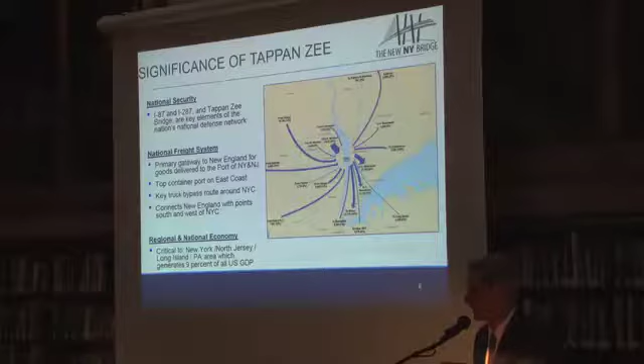So the significance of the Tappan Zee - it's strategically located and meets the criteria for critical infrastructure according to the Department of Homeland Security. It's a primary gateway for goods being delivered to New England from the ports of New York and New Jersey. It's obviously a major commuter corridor as well, and also receives a good deal of recreational travel on weekends, especially this time of year. So it's important to the local, regional, and national economy.

Why do we need to replace the bridge? Well, it was opened in 1955 and said to have a service life of 50 years. And that turned out to be a pretty good estimate, because it was in the late 90s and early 2000s when the Thruway Authority needed to spend increasing sums of money just to keep the bridge operational.

The bridge carries 145,000 cars a day, which exceeds the design that was considered by a good amount, 40% more than what it was planned for.

We're always on the morning and afternoon traffic reports, which is never a good thing. The accident rate is twice the average for the whole thruway system, and that's exacerbated by the fact that we don't have any shoulders for emergency vehicles or any disabled vehicles. So even a minor fender bender, someone with a flat tire, there's nowhere to go, and it results in significant backups.

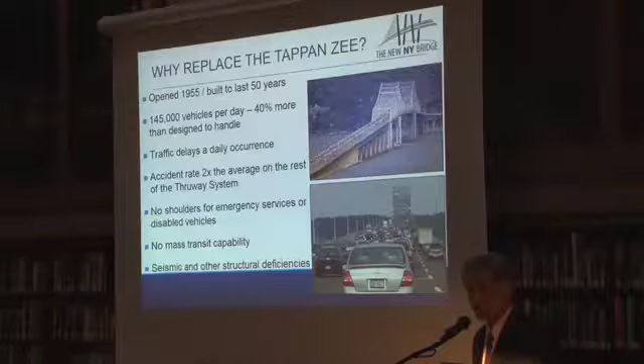There's no mass transit capability. Remember, I talked about the corridor study and the desire for mass transit at some point in this corridor. And also we have seismic and other structural deficiencies, but I can assure you that the bridge is safe, so don't worry.

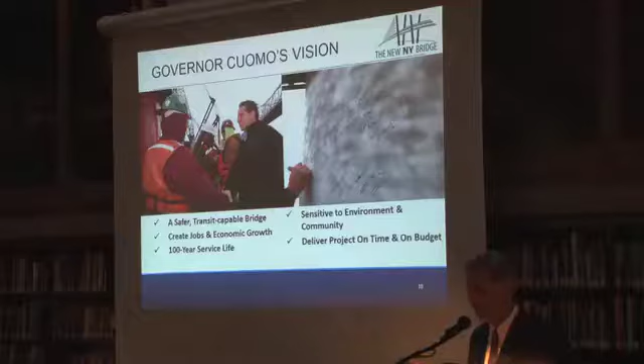So in 2011, after a decade of study under the corridor project, Governor Cuomo decided it's time to build the bridge, and we pivoted from that 30-mile corridor project to a standalone bridge project. He laid out several objectives at that time: first, build a safer, transit-capable bridge, going back to the corridor study.

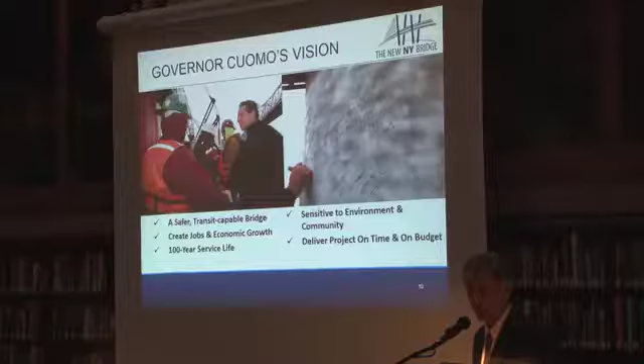Create jobs and economic growth. We were just coming out of the 2008 recession, so there was a desire to improve the economy. Also, a 100-year service life before major maintenance. We didn't want to come back in another 50 years and have to do this again, unlike the first bridge.

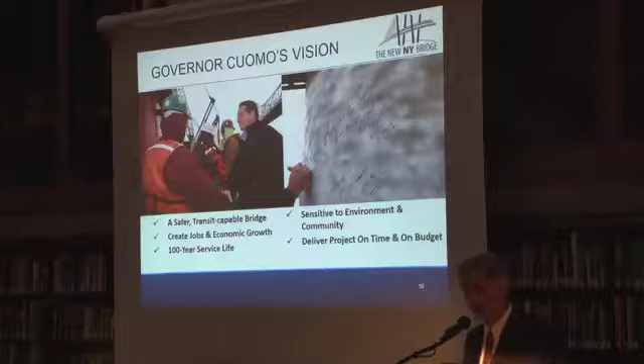Sensitive to the environment and the community, we wanted to go above and beyond the regulations and be good stewards of the environment. We also wanted to be good neighbors to the community. The communities on each side of the bridge were kind of under a cloud for a long period of time, not knowing if the bridge was going to be replaced, what the impacts would be to their communities, because when the bridge was originally built in the 1950s, it had a pretty significant impact on both the Rockland and Westchester side, as you can imagine.

So we had a good neighbor policy for the project, and we wanted to deliver the project on time and on budget, and that got us to the design-build project delivery mode. So here's an overview of the existing bridge.

We have 7 lanes, no shoulders, as I mentioned. We have a central movable barrier, so twice a day that barrier is moved to allow a 4th lane in the peak direction: 4 lanes eastbound in the morning, 4 lanes westbound in the afternoon.

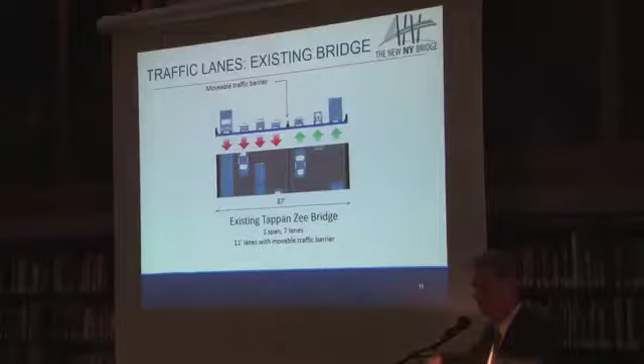So I'll go through a little bit of the sequencing, or the staging of construction. Here's the existing bridge, and the new bridge, or bridges I should say, will be built immediately north of the existing one.

So we took advantage of available right-of-way to the north of the bridge, and were able to build the entire northern span without impacting traffic on the existing bridge. We're also able to build about 80% of the southern span, or eastbound structure, as well at this point in time, and this is the stage we're currently at right now.

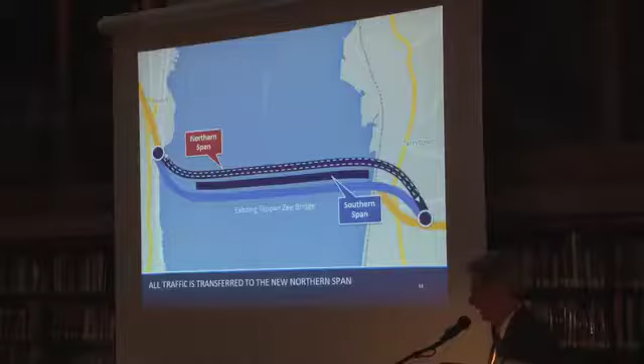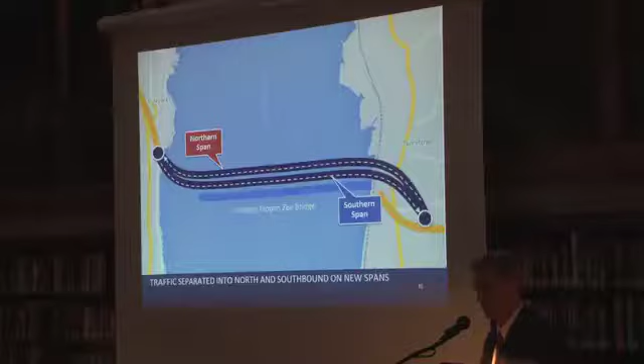Later this year, hopefully in a couple of months, we're getting ready to move all traffic from the existing bridge onto the northern span, which will then allow us to proceed with demolition on the ends of the existing bridge so that we can complete the southern span. That'll happen about a year from now, in 2018. And then, of course, the last stage is to demolish anything that's left of the existing bridge.

So the configuration, when all is said and done, will look something like this. The northern span, which is 96 feet wide, is where we're going to have all 8 lanes of traffic in a couple of months. That width was determined by the need to maintain traffic.

But in the final configuration, we'll have 4 standard 12-foot travel lanes, a standard shoulder of 10 feet on the right, and an over-wide left shoulder, which will provide the ability for a dedicated bus lane, again thinking of the multimodal desire here. And significantly, we'll have a 12-foot wide shared use path for pedestrian and bicycle use, which is something that's obviously not available now to the communities to cross this part of the river by bike or walking.

The southern span, or eastbound structure, is 87 feet wide, and that width was driven by the desire for operational redundancy. If something should happen to one bridge or the other, we wanted the ability to maintain traffic on the other bridge, so we built it a little bit wider just in case.

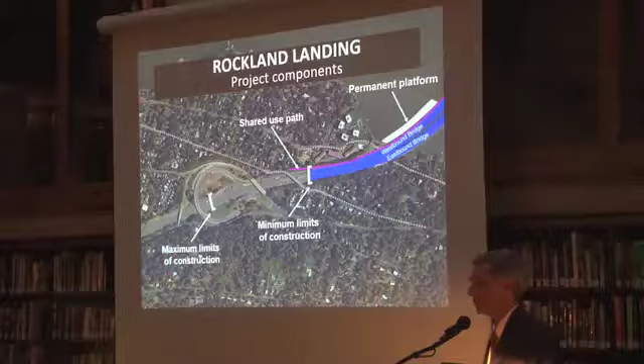On the landings, there's a very limited amount of work, just what's necessary to stage the work for the bridge construction. The shared use path will extend all the way into the interchange 10 area, where it will connect to other similar facilities on the Rockland side. We also have a permanent maintenance dock here for the thruway's marine vessels to maintain the new bridge.

On the Westchester side, it's a little more complicated. We still have the roadway reconstruction, and we also have the shared use path connecting to Route 9, which is South Broadway in Tarrytown. But we also have a number of thruway facilities, namely the maintenance facility and the state police facility.

We gave the contractor the option to either rehabilitate these buildings or replace them and use this area as a staging area. They chose to replace it, so they had to move all of our staff to a temporary location about 8 miles away on the Rockland side, and then used this area for their bridge work. Now that we're getting close to completion, they've started reconstructing these facilities for us.

Also importantly, this is where the existing toll plaza was. It was a conventional toll plaza with 10 toll booths. We also had highway speed E-ZPass at this facility.

During the development of this project, the Thruway Authority was just contemplating going to all electronic toll collection, which I think a lot of toll facilities are doing down in the metropolitan area. So we were at a watershed moment where we needed to decide if we were going in that direction, and this project kind of pushed us into that.

As you can imagine, if we were to have a conventional toll plaza here with highway speed E-ZPass, we'd actually be affecting the entire eastbound bridge back to the main span, needing enough distance to taper out to get into the toll plaza. So by going to all electronic toll collection, we reduced the footprint on the land, but also, more significantly, on the bridge itself—less bridge to build and less bridge to maintain.

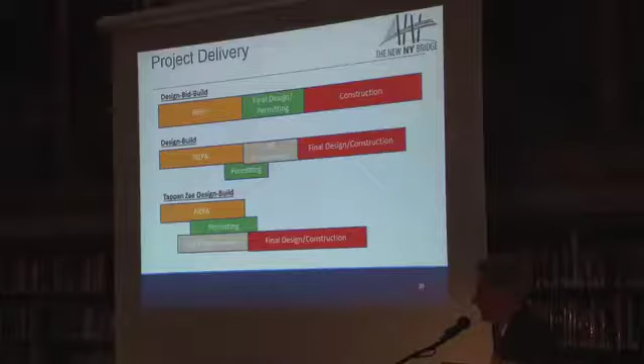I'll talk a little bit now about the design-build procurement, and most significantly, how it overlapped the environmental impact statement. At the top, you can see the normal process for design, bid, build. You do your environmental documentation, analyzing impacts, doing your evaluation of alternatives. Then you do your final design, and then you go to construction.

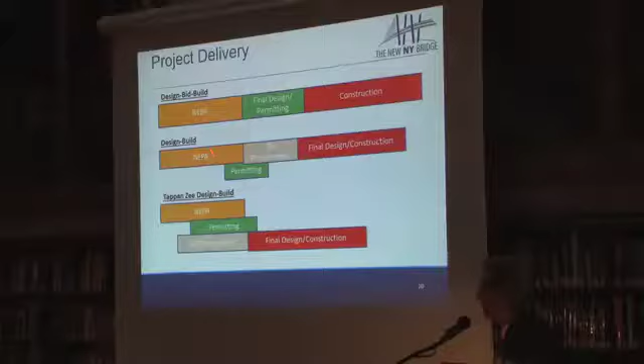Design-build normally upfronts the permitting a little bit, but you wait for your environmental assessment to be done to pick a preferred alternative, and then you go through the design-build procurement. Well, on this project, we did everything all at once, in the desire to get to construction sooner. As you know, our governor doesn't have a lot of patience, right?

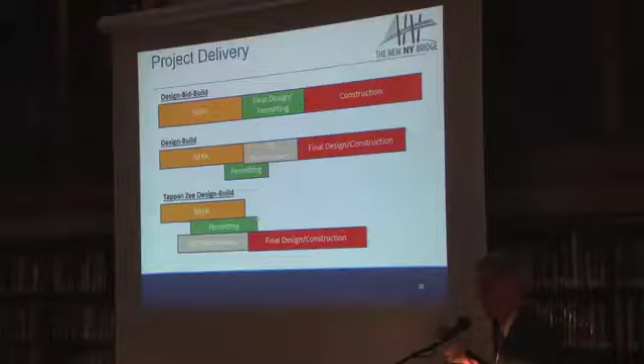So sooner the better. We were able to do this because we had only one build alternative—otherwise, you're not able to do this. So the proposers were able to focus on just the replacement option for the bridge.

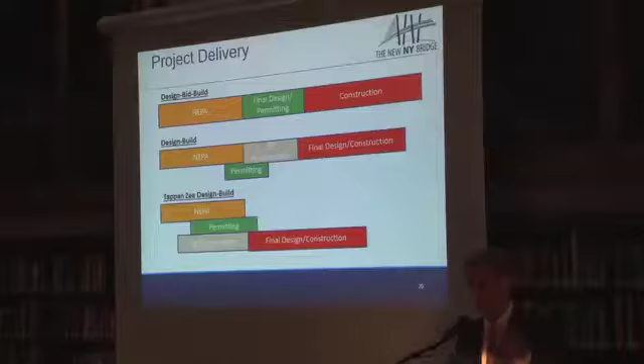This was challenging because we were meeting with proposers confidentially during the procurement process, meeting with the public in forums such as this during the environmental impact statement, and meeting with regulatory agencies to talk about environmental permitting. So we'd be reacting to various things we heard from each audience and had to make sure the corresponding documents were reconciled—in other words, did something the proposer said confidentially fit into the bounds of the environmental impact statement?

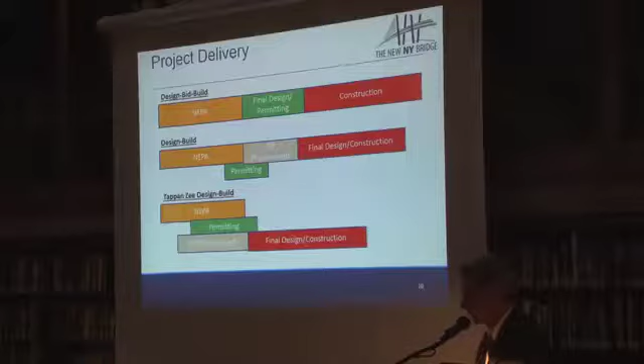And did we want to perhaps allow that or not? Or something happened in a public forum and we changed our minds about something, we needed to relay that to the proposers. So it was a very dynamic stage of the project and very challenging. The procurement was a one-year process.

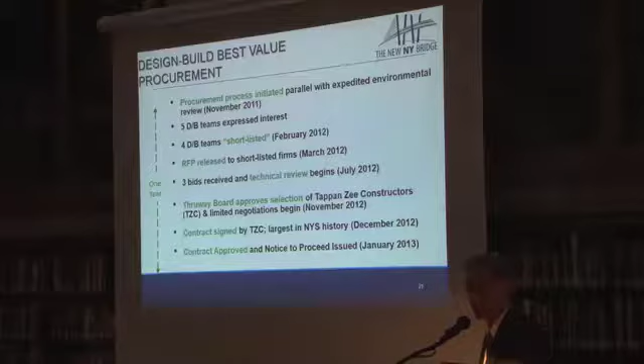This was the first design-build contract in New York State. In November of 2011, we got enabling legislation. We released the request for qualifications and received interest from 5 design-build teams. We shortlisted them to 4, and finally received proposals from 3. It was the largest contract in state history, and I believe it still is. We issued a notice to proceed in January of 2013.

Some of the things that made the procurement successful: we had to pay the unsuccessful proposers. We had to do a lot of convincing to the state comptroller that we needed to pay contractors to submit a proposal. Very unheard of, but necessary for a couple of reasons. One was to instill confidence in the industry, this being our first design-build contract. The other was because proposers spent significant amounts of money to submit a bid, up to $6 to $7 million, so they needed at least some compensation to offset that risk.

We also did what we call smart early work. One of the things about design-build is that you transfer risk from the owner to the design-builder because they're designing and constructing it. But to limit risk, you want to provide them as much information as possible, because risk equals cost, particularly their contingency costs. So we did a test pile program and soil borings across the riverbed, because the foundation work was probably the riskiest and most challenging part of the project, up to 40% of the cost. We wanted to give them the best information we could to limit their risk.

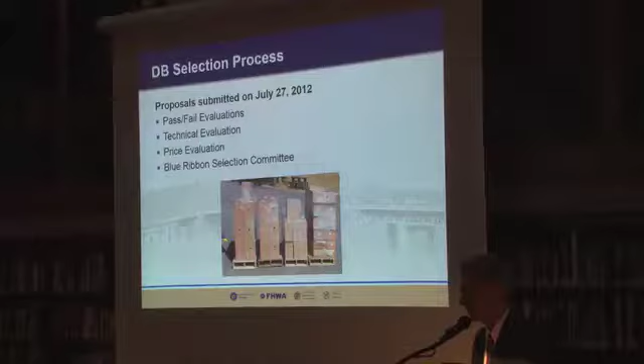The selection process was a 4-part process: a pass-fail evaluation, financial ability and other evaluations, the technical evaluation which was the quality of their proposal, and the price evaluation. Price and technical were weighted 50-50. Then we had the actual selection committee, made up of industry leaders and some community representatives.

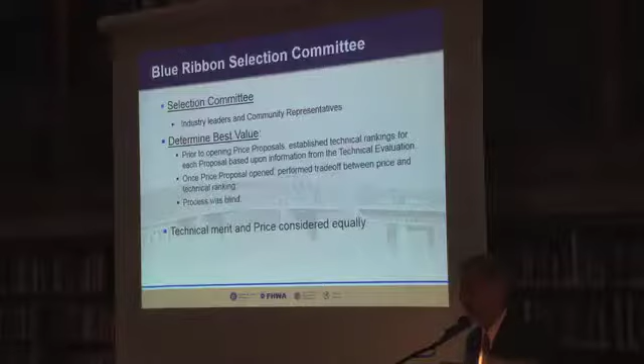Prior to the selection committee seeing the price, they ranked the proposals based on technical quality, done blind — they didn't know the proposer's name, we gave code names. So they would rank the proposers 1, 2, 3 according to technical merits, and then they were provided the price. It would be easy if the highest-ranked proposer on quality was also the low bid — then it's a no-brainer. But that seldom happens, so they have to do what's called a trade-off analysis.

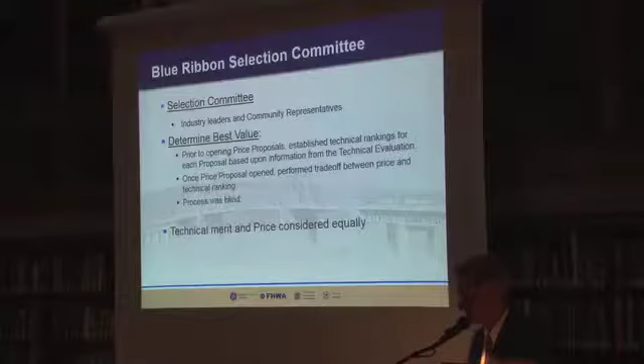In this case, Tappan Zee Constructors was declared the best value proposer, with a bid of $3.142 billion — we like to call it the pie bid. It's also about the length of the existing bridge, 3.1 miles — I don't know if that's just a coincidence. Tappan Zee Constructors is a consortium of 4 large firms: Fluor, Granite Construction, Traylor Brothers, and American Bridge, which incidentally was the contractor that built the existing Tappan Zee. HDR is the lead design team.

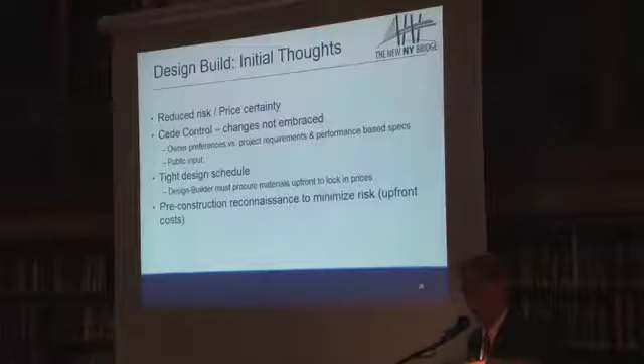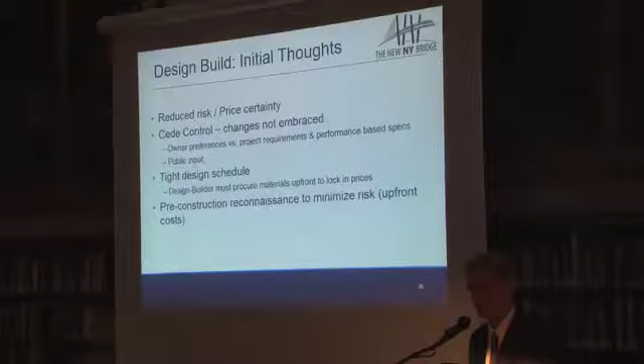So after 4 years with design-build, what do we think? It's definitely reduced our risk as the owner, as the number and magnitude of change orders on the contract, or extras, is significantly less compared to design-bid-build. However, you cede a lot of control because you don't have prescriptive requirements — it's more performance-based. So preferences are very difficult to have the design-builder adopt, and they resist any types of changes. It also limits the amount of meaningful public input after you select a design-build team.

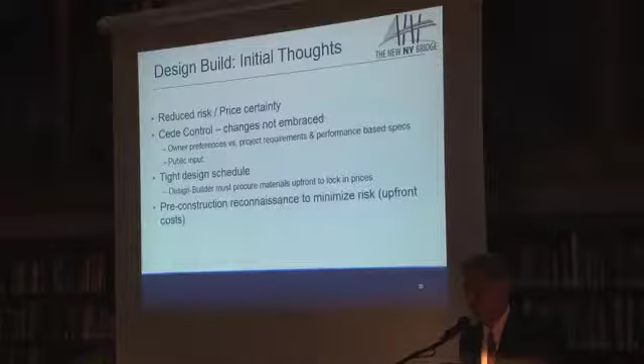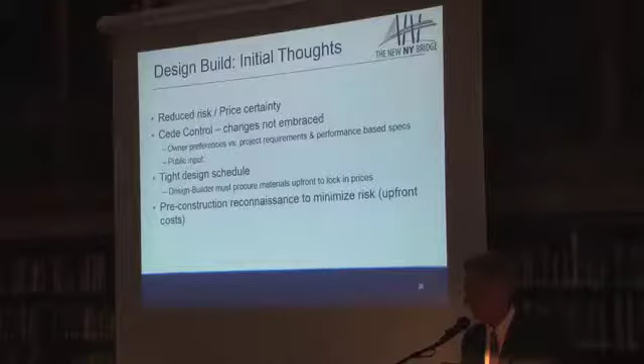We were also naive with respect to the design schedule. It was very aggressive — we figured a 5-year construction project, with design happening just in time for each element to be constructed up till maybe year 4. But they wanted the design done in 18 months, largely so the contractor could procure materials and limit their risk from price escalation. A lot of projects at this duration would normally have price escalation clauses, for asphalt, gas, or steel, so if industry prices went up the contractor would be compensated. In this case we didn't have those escalation costs, so the design-builder wanted to procure materials and lock in prices.

I'll talk a little bit about the approach spans. When I mention approach spans, that's everything except the main span, the cable-stay portion. On a lot of bridges the approach span isn't significant, but when we have a 3-mile long bridge, that's the majority of the bridge structure in this case. Here's a rendering of what it'll look like when done — typical steel girder construction, but the spans are much longer than the existing bridge, 350 feet long. So we only have 44 spans for the new bridge as opposed to the 198 on the existing, meaning a lot less infrastructure in the river.

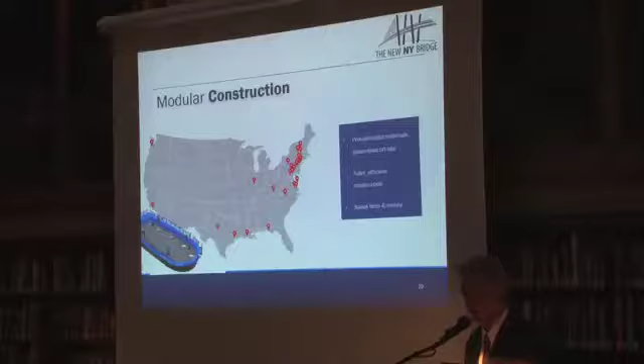So some of the things they had prefabricated were the pile caps, done in North Carolina. We also had the pier caps, the structure on top of the pier columns, fabricated in Virginia and barged up to the bridge site. And then, probably most importantly, they had a steel assembly facility just south of Albany.

The foundations were the area of greatest risk and uncertainty, because of the challenging underlying soil conditions of this part of the Hudson. You have the first layer, an organic silty clay, or as those of us non-geotechnical engineers like to call it, muck. With this muck, the first 70 feet or so of a pile is basically driven by self-weight. So the contractor was concerned about actually losing a pile, never mind having to hammer it in place — it just sunk.

After getting through that, you encounter a hard layer of glacial till. You think you've hit rock, but it's glacial till, so you have to get through that. Then, if you're lucky, you reach bedrock. But that bedrock has a lot of sloped rock conditions, making it very difficult for piles to grab into. So there was a large concern about pile damage. Luckily, over 1,100 piles on this project, and only one so far has been damaged. The piles are typically steel pipe piles, open, 1 inch thick, varying in diameter from 3 feet to 6 feet.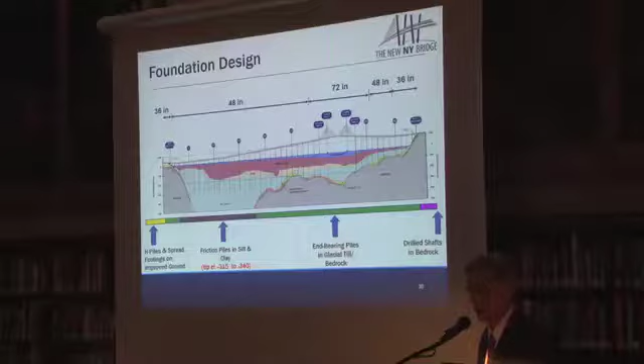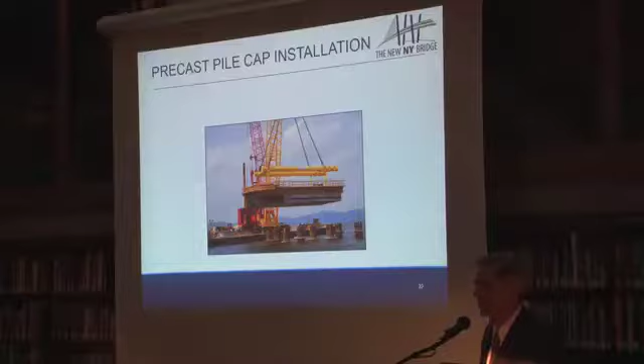Here are those pile caps made in Virginia, at the fabrication facility. You can see how extensive the reinforcing is. On the right, a section is being readied to put on a barge to deliver to the project site. Once it gets there, it's lifted onto the piles that were driven. On the bottom of this 'tub,' as we like to call it, there are holes 1 foot larger than the diameter of those piles — so a 4-foot diameter pile would have a 5-foot hole. It was pretty amazing how accurate this was; we only had a couple of occasions where they needed to chisel out a little concrete to make the tub sit on the pile, but largely it was done to perfection.

Now here's the pier cap. These were again precast in Virginia. Originally, Tappan Zee Constructors was not going to precast the pier caps, but because of the success with the pile caps, they decided, hey, why not? So the columns were cast in place. You can see the reinforcing steel sticking up from the columns, and there were sleeves in the bottom of this pier cap. Again, the precision needed for all this to go together was significant.

Another big element of this contract was a floating batch plant — we had 3 of these. It would have been virtually impossible to do this any other way, to have concrete delivered conventionally by truck. It would have been over 20,000 trucks necessary for all the concrete needed for the bridge. These plants were all certified by DOT as a typical plant facility would be.

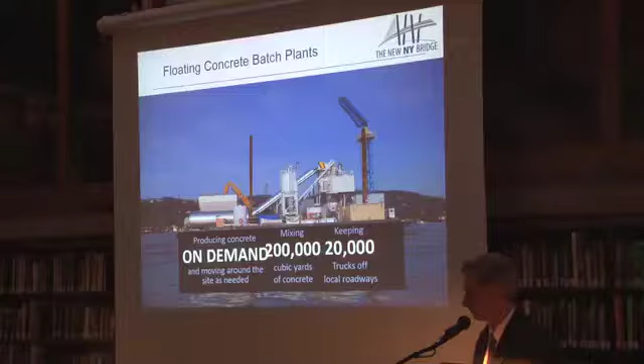Here's that pre-assembly yard, just south of Albany, about 100 miles north of the bridge site. There were 2 primary steel fabricators, one in Pennsylvania and one in Virginia. They fabricated steel girders 100 feet long, 12 feet high, delivered them to this site, and then in assembly line fashion spliced the 100-foot long girders into lengths of up to 400 feet, also conjoining 2 or 3 at a time. Any utilities were also put on between these girders at this site, again reducing the amount of work that needed to be done at height over the bridge.

Once they were fabricated up at that facility, they were then placed on a barge and floated down the Hudson. You don't get a real appreciation for the size of these things at a distance, but they're 12 feet high, double me.

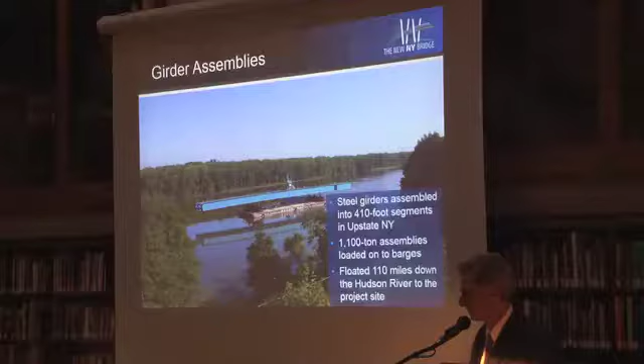The other significant piece of equipment on the contract was this huge crane, the I Lift New York super crane, otherwise known as the Left Coast Lifter. It was originally built for the San Francisco-Oakland Bay Bridge, and luckily they had the foresight to think maybe it'll be used on the East Coast, so they made it to just fit through the Panama Canal. And I mean just - it wasn't a lot of clearance.

That was brought to the bridge site. They had to wait for a super low tide to get it under the existing bridge with the boom down, literally only having 4 or 5 feet of clearance. This piece of machinery is able to lift up those 400-foot long sections of steel, 12 feet high, 2 or 3 at a time.

Now, being so big, it's very clunky to move this big crane. The boom doesn't rotate like most cranes do, so you just set everything in that one position. It's a series of cables and tugboats that kind of maneuver this thing to set the steel in place. It's a pretty complicated operation. The first time they did this, it took about a day, but after the learning curve, they reduced that to about half that time.

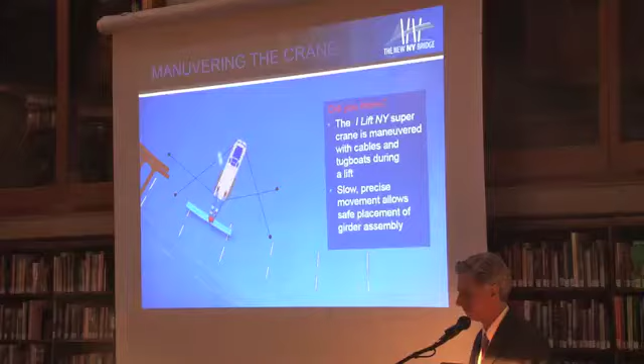All right, doesn't want to advance here. I guess it wants to set that last piece of steel. Here we go. And that video is not working, sorry. This should be... technical difficulties here. Try this way.

All right, you've seen that already. Sorry about this.

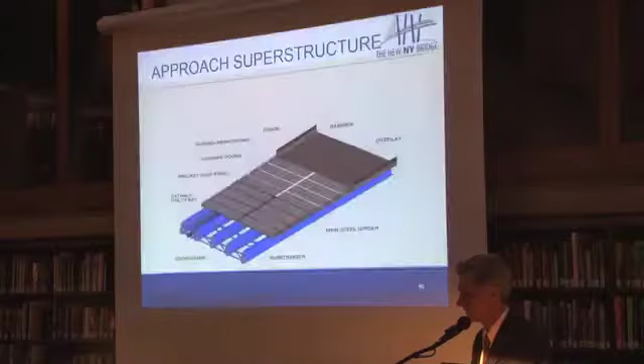After the steel comes the structural deck, which was also prefabricated panels. You can see this panelized system. They were made in Pittsfield, Massachusetts, and also in upstate New York, and delivered to the bridge by barge, then placed on the steel. That was followed by the cast-in-place closure pours, stitching those panels together, and then the final piece is the overlay, which is the riding surface.

Another neat design element for the bridge were these seismic isolation bearings. It's sitting on top of a pedestal, and this is the bottom of a steel girder. This illustrates how this bearing works under a seismic event - it allows the bridge to move in a controlled way to limit damage and also failure of the bridge during a seismic event. It also resets itself after a seismic event. Normally after any kind of earthquake you would need to go to the bridges that were affected and reset the bearings. This one is self-resetting.

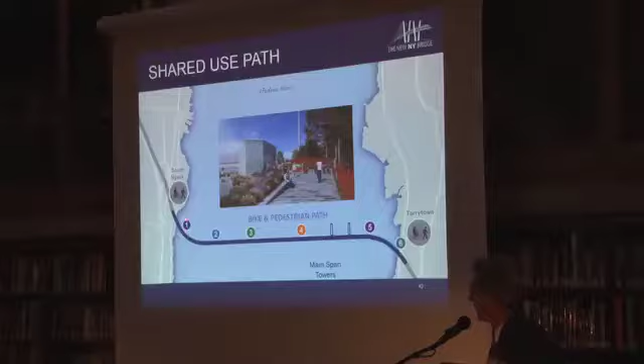The shared use path, which I mentioned earlier - one of the unique aspects of the project is we have amenities on each landing associated with the shared use path. We also have 6 what we call overlooks, and each one has a theme. This is one near the Rockland side, fish and ships. They also have amenities with seating and canopies, and this is one of the more fun elements of the contract, something the communities are looking forward to.

Onto the main span, cable stay bridge. The towers are 419 feet high, about 100 feet taller than the existing truss. They're splayed outward so that there's no cabling or other structural element above the roadway, which is important because there's no concern with icicles forming during the winter and falling on traffic. It also allows the Thruway Authority to do maintenance and replacement of cables without impacting traffic.

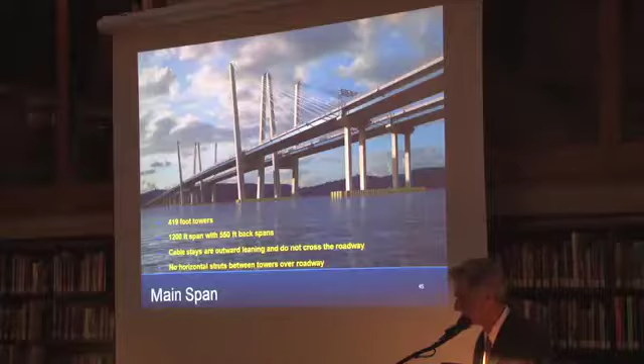Here's another view looking at the westbound bridge - here's the shared use path, and then the overwide left shoulder, right shoulder, and again nothing over the roadway, giving kind of a nice open feel to it. The foundations for the main span...

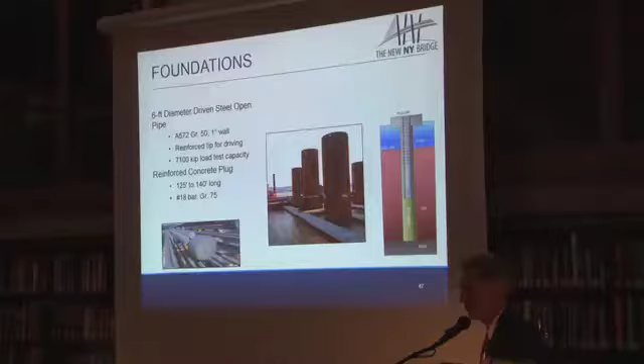Piles are driven 250 feet to rock. Within those piles on the main span, actually for all the piles, we have this what we call a concrete plug, which is reinforced concrete that goes into the pile, in this case 140 feet or so, and that provides connection between the pile and the substructure.

This illustrates the enormity of the foundation for the main span. It literally fits the same length as a football field. It's 64 feet wide, 14 feet deep.

These are what are known as climbing forms or jump forms, and this greatly facilitated the construction of the towers. The towers change in dimensions as you get higher, so these forms were able to be modified to adapt to the different changes in geometry as you went up the towers. This kind of illustrates how that worked.

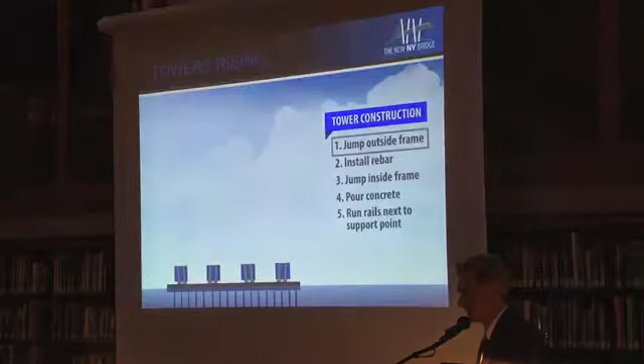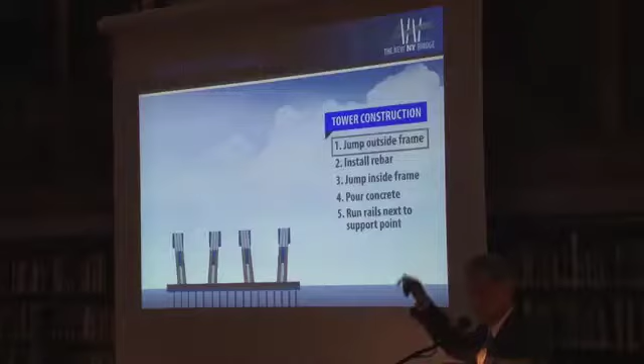It was a two-frame system. You would jump the outside frame first, put reinforcing steel into the tower walls, then jump the inside frame, pour concrete, and continue. This was done in roughly 15 to 20 foot lifts, as we call them, and it took about 10 days to go through this sequence.

Yeah. And once again, sticking here.

So the cable stays, there's 96 cable stays on each bridge. They vary in length and diameter and are all protected by a high-density polyethylene pipe.

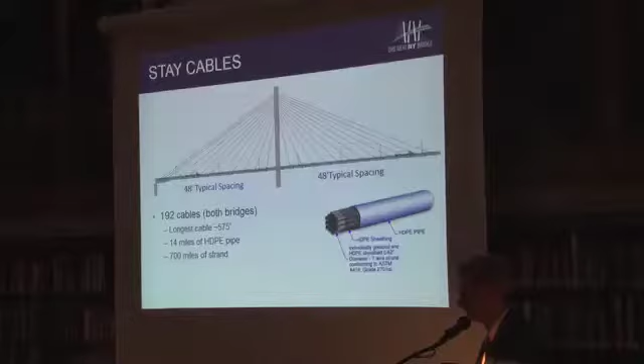Sorry about this. This is what's happening. Oops, got to go back.

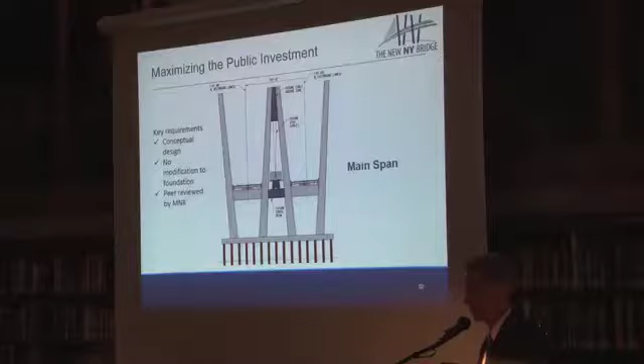I mentioned before that this was part of a corridor study, so the desire to have the ability to provide for future transit was part of this project. Part of the requirements was to design the foundations for the heaviest transit load, which is a E60 commuter rail, so if trains were added in the future, we wouldn't have to go back into the river. The foundations are capable of supporting commuter rail.

What would be necessary, though, would be to modify the superstructure here for the main span, taking advantage of these inclined tower legs. We would conjoin the middle section of these legs, drop cables from that point, and then add a new crossbeam that would enable one track in each direction. So it was a pretty elegant solution.

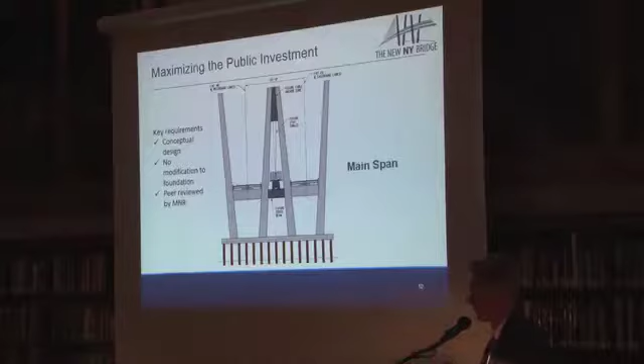They had to design this conceptually to show us that it was possible, and we had Metro North peer review it to make sure that they were on the up and up. For the approach spans, not as elegant a solution, but again, the foundations would not need to be modified. This is just one particular way that you would be able to provide for future transit loading.

Now to some environmental challenges, and we had many. The existing Tappan Zee Bridge is considered historic, mainly for its foundation design and the buoyant caissons. There's also a shipwreck nearby, believe it or not, a coal barge.

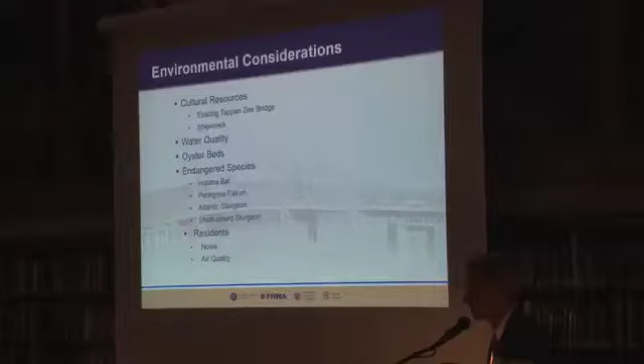Water quality was a big part of what we do. We've literally taken thousands of water samples at various construction stages. The new bridge is right in the path of oyster habitat within the Hudson River. We have endangered species, most significantly the Atlantic and the short-nosed sturgeon. And then we also have people, so we needed to deal with that as well.

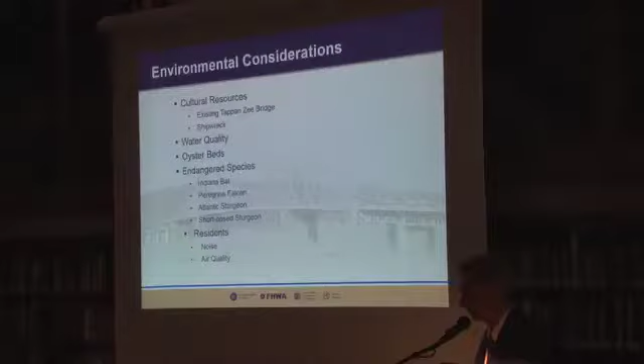One of the first things necessary for the project was to dredge. Once you get out of the navigation channel, which is 40 feet deep, this part of the Hudson River is relatively shallow, anywhere from 4 to 8 feet depending upon the tide. So in order to allow these big pieces of equipment to function, they needed to do some dredging.

The environmental impact statement estimated that we would need to dredge 2 million cubic yards. Tappan Zee Constructors reduced that, cut it in half actually, because they were able to design it more efficiently for what they planned to do. So it's kind of an example of how design-build also reduced environmental impact.

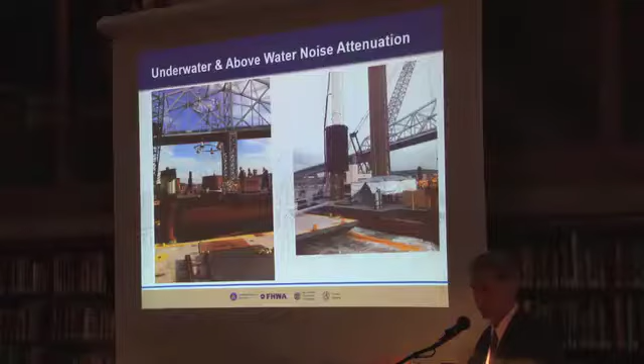Here's some of the mitigation we needed for the fish and underwater noise attenuation. What was involved is that we have these compressed air rings that were lowered onto the piles, and they created this jacuzzi effect you see on the right when piles were being driven. So you'd have this column of bubbles, we call them bubble curtains, underwater that dampened the sound that would ordinarily affect fish in perhaps a fatal way.

That was one thing that we did. For above water noise for the people, we had these shrouds that went over the top of the pile cap that kind of deadened the noise for the residents.

Sturgeon monitoring required a lot of mitigation. This illustrates we have near and far field monitoring. A lot of sturgeon have already been tagged, so we have monitoring devices that pick up those tags. We also needed to capture and tag about 100 sturgeon ourselves as part of the mitigation for the project, so scientists can study their behavior during different phases of construction, how they reacted to noise, et cetera.

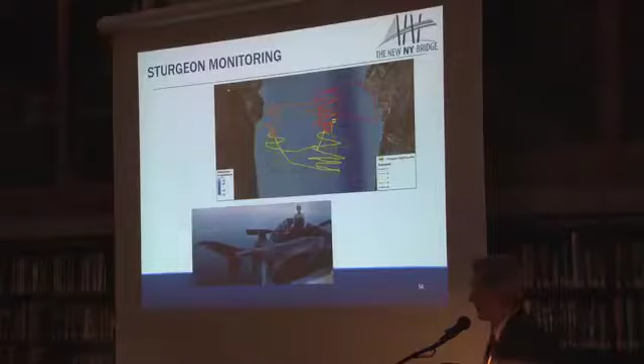The sturgeon are pretty big fish, anywhere from 8 to 12 feet long, which is pretty amazing when you think about it for this part of the Hudson River.

As for the oysters, we affected an oyster colony, so we needed to harvest a number of shells and then move them to an area not impacted by the project, to rehabilitate about 11 acres of oyster community.

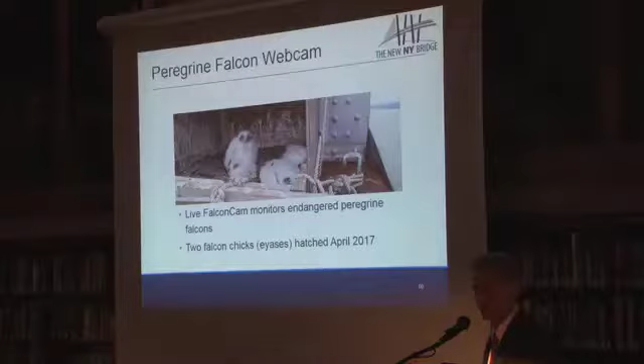Then, of course, we have our peregrine falcons. We have a nesting box on the existing bridge, and the falcons are in residence from about February to about this time of year, when they have their chicks. We had 2 this year. We run a naming contest with schools in the area, and they get to name the chicks. We also have a new nest on one of the towers of the new bridge, so we're hoping that next year the falcons find their way to their new home.

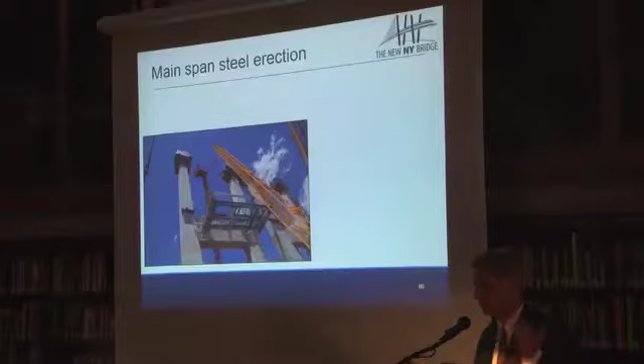On the main span, these steel sections are called field sections. The main span is a balanced cantilevered construction. It's kind of like doing one side of the tower with the steel, then putting steel on the other side, and it's balanced in that way.

After setting a section of steel, you would then install cable from that steel section up into the tower, into what's known as an anchor box. So you can kind of see the development, and this is done back and forth.

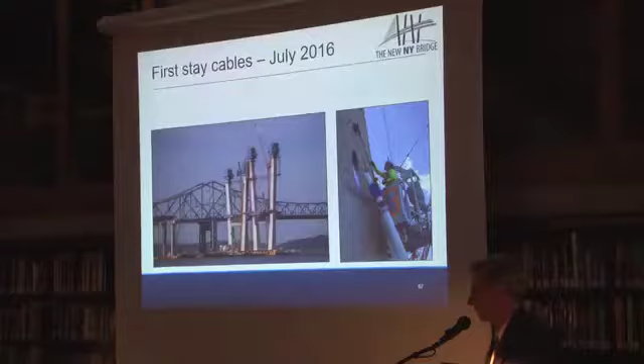Further along, here's the installation of one of these stay cables. You can see their length — it's kind of like a wet noodle — so it requires several cranes to install these things.

I'll talk a little bit about some of the workers, and there are many of them. Over 6,000 people have worked on the bridge over the span of 4 years. At the height of construction, there was about 1,100 to 1,200 on site at any given day. Right now, we're probably in the 800 range.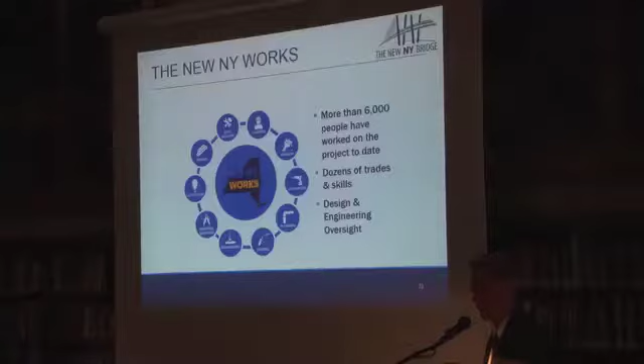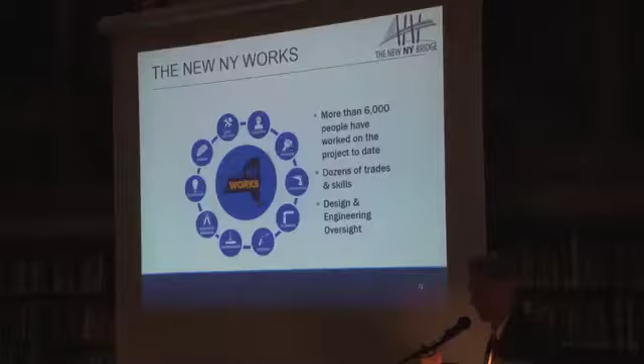Dozens of trades are involved, not just heavy highway and bridge construction, but we also have vertical construction for a number of buildings, as well as a lot of systems — communications and power networks, et cetera — plus a fire suppression system on the new bridge. We also have the behind-the-scenes folks, those who don't wear hard hats every day, like me, in the design and oversight of the bridge. During the height of design, there were over 700 people working on the design of this bridge.

Hopefully I have a little video here interviewing some of the workers.

My name is Christopher Tobacco, I work for TZC in Local 1556. Brian Jones, my parent company is Traylor Brothers Construction, I'm the area superintendent for Pier 32. I'm Lorraine Hart, a union carpenter, Local 279, working at the Tappan Zee Bridge. There's a lot of work involved, a lot of things you have to be careful of, a lot of safety involved, and it's great, it's a great experience. I've hit a couple of big jobs like this, but nothing this size, so it's kind of interesting to see an entire bridge built up from the bottom. It's a lot of work, a lot of challenge.

The challenge is being away from home and working on some things that have never been done before. Yeah, it's been very interesting. Last week marked a year that I'm working on the job. It's a lot of juggling to get everything going, but now it seems to be running pretty smoothly.

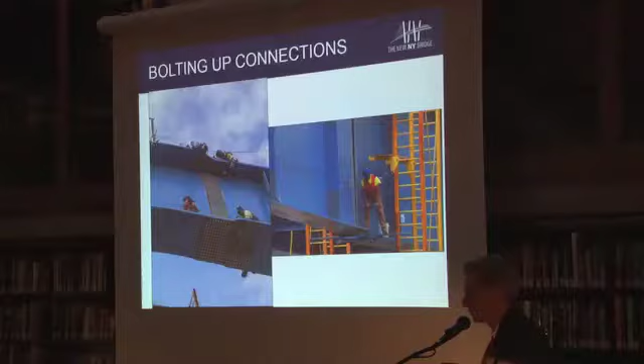That's for a couple of reasons. Access is by boat at this point in time, so it takes time just to get to where you're working. And once you get there, you have to climb up staircases to get there, and the more work progresses, the higher you're climbing every day. So these guys must have been in shape at the end of the project.

Similarly, for the tower crane operator, even more so - here you can see where he lives, basically, for his entire work shift, because for him to get to work, he's climbing up this vertical ladder system in this red cage there. So again, you don't want to do that too often if you don't have to.

Here's the inside of the big crane, the Left Coast Lifter. It kind of looks like an air traffic control system. It takes 2 people to operate it. They had to undergo 6 months of training before they lifted their first piece of steel.

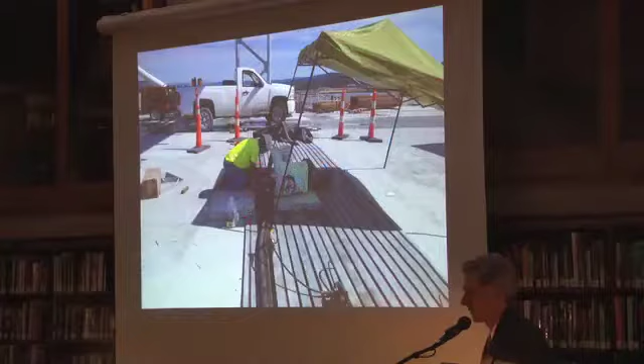Working on the bridge is a different environment. Once you're out on the river, as many of you may know, the climate and temperature vary significantly from land to the bridge site. So it's usually very hot, very cold, or very windy—there's seldom a nice day. These guys are smart and protect themselves from the sun with a little tent system as they work on one of the expansion joints.

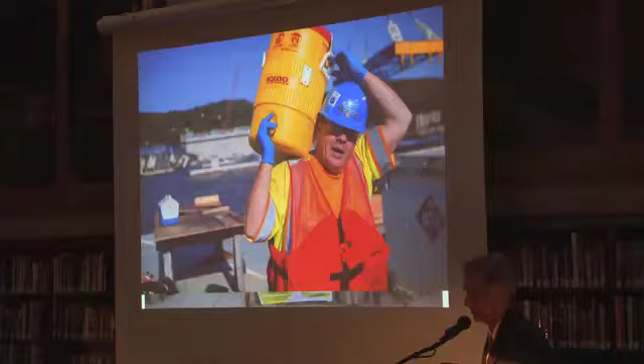This crew is installing the stitching for the deck panels, which is part of the structural deck. It takes a lot of people who aren't building to service those who are. One of the more important things is making sure everyone has cold water, especially this time of year but even in winter. It's amazing to see barges loaded with hundreds of water coolers or porta-johns that need to be swapped out every day.

This is the celebration of Safety Week that we had this year. It gives you an idea of the number of people on the project. We had a nice opening ceremony on the main span.

Some observations of people who work on projects like this: a lot of the engineering folks are big-project people. They move with the work—almost like they're in the Army, moving from project to project every 3 or 4 years. There are a couple of locals, and similarly for the work crews themselves, it's a mix of out-of-town folks with local support.

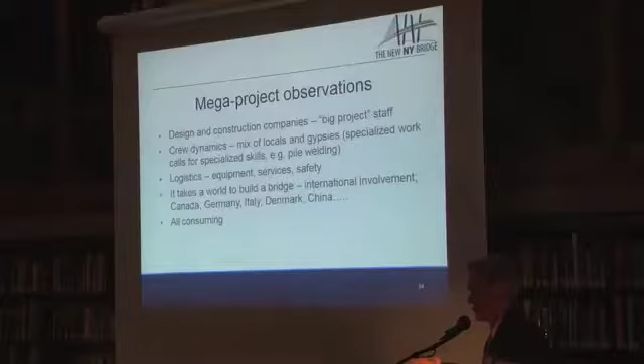The logistics for projects like this are unbelievable. At one point we had over 100 barges in the river and 40 cranes. Tappan Zee Constructors had a whiteboard in one of their conference rooms that looked like battleships, with all the marine equipment laid out and where it needed to go on any particular day. Just figuring all that out is amazing in itself.

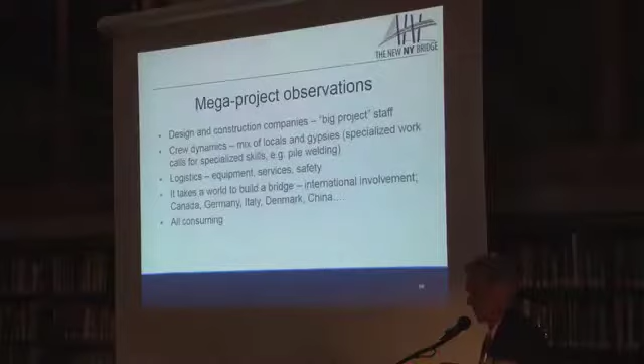It takes a world to build a bridge like this—literally. You saw all the places across the United States that fabricated elements, but we also had contributors from other countries. The main span designer is based in Vancouver, and we had testing and fabrication of other elements in various other countries as well. Projects like this are all-consuming, so you have to be totally committed—it's kind of your life until it's done.

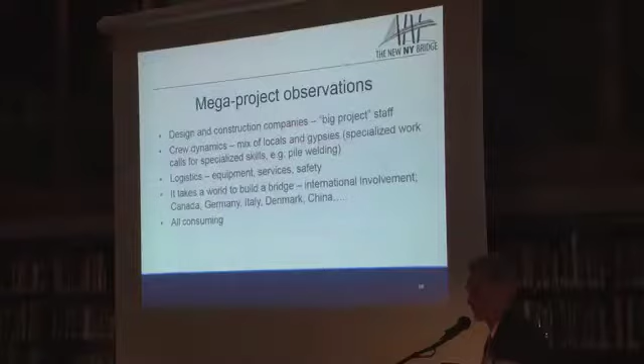So with that, I'll entertain questions.

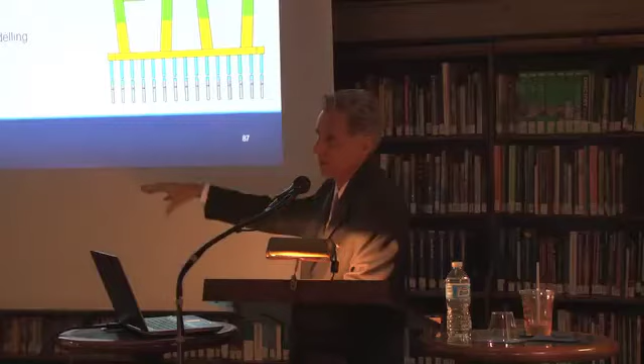Will any of the specifications for this bridge be taken and applied to later construction statewide through the Thruway Authority? Yeah, as a matter of fact, not just the Thruway Authority, but other agencies within and even in other states have used our specifications and adopted them for uses on other projects. So, absolutely.

I was wondering, since you're opening that to pedestrians, how windy do you expect it to be out in the middle of the bridge? Yeah, there's a big concern with that, as I mentioned, the environment on the bridge is usually very different than it is on the land. So it's going to be part of the challenge with the shared use path to make sure that people are prepared for windy conditions. It's not unusual to get gusts of 20, 30 miles per hour or more.

Certainly on windy days, you would think that we would have fewer people that would want to walk on the facility. We've even talked about at what wind speed would we say, no, you can't use the facility. So we're still kind of asking those questions and developing some protocols for that.

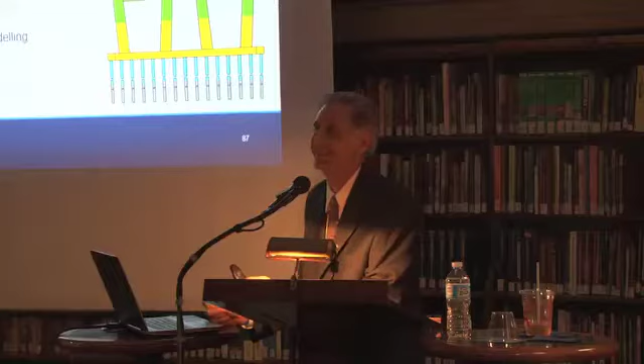I have a real novice question, which is, could you repeat this further south so we could have something in addition to the Lincoln Tunnel, or instead of another tunnel? Another tunnel, yeah. I wish we could. I know there's a lot of need for river crossings, and you can never have enough of them, right? Yeah.

With this kind of complexity and number of men, how was your safety record throughout to date?

The safety record has been remarkable, really. We haven't had any fatalities, which is certainly good. For the existing bridge, I believe we lost 3 or 4 people. When you compare our safety rate to other projects of this size, we're just below the average. So safety is a big concern.

My question was similar, on OSHA - were OSHA individuals there for safety issues? Well, OSHA isn't typically on site. They come when it's usually not a good thing when we see OSHA - they react to an occurrence. We've had some instances where they were on site to do investigations, but otherwise they leave it to the safety officials on the project.